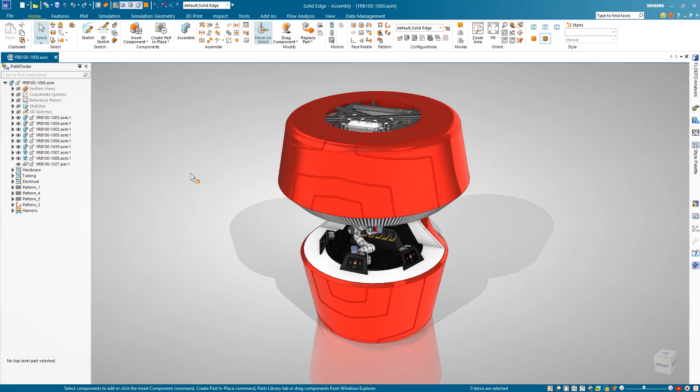Transform your manufacturing and maximize your design data with the powerful automated tools of Solid Edge's fully integrated CAD/CAM solutions.

Starting with some 5-axis machining, we'll focus on this part. Since it has features on all sides, a 5-axis approach will allow it to be machined in a single setup. The fixture has also been designed completely in Solid Edge, using a window frame technique, where the stock body also serves as the holding device.

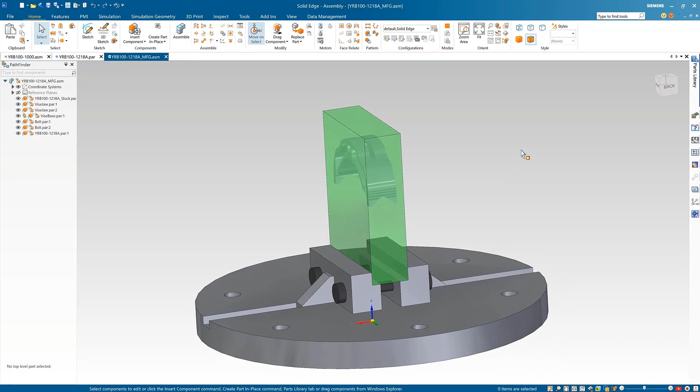A single button click sends the whole fixture and part to Solid Edge CAM Pro. Opening an existing setup reveals some CNC programming work that has already been done.

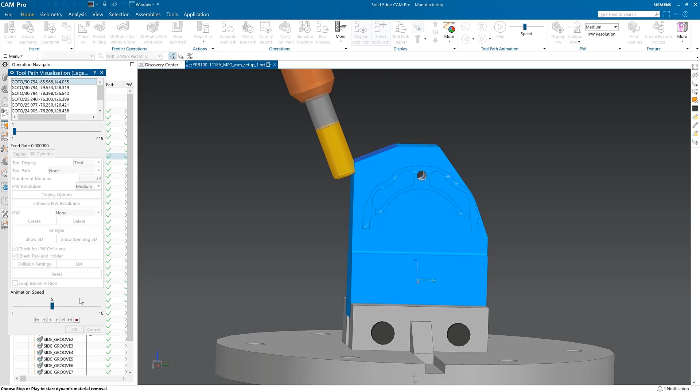Solid Edge CAM Pro now supports the adaptive roughing cut pattern for 5-axis roughing. This means very efficient machining and expert control on the stress of the cutting tool, which extends tool life as a result. Here, we'll also look at the machining simulation.

This is another great innovation in Solid Edge CAM Pro: the ability to perform G-code-based simulation. Here, the machine motion on the virtual machine is being driven by the actual G-code file. We can visualize all the axes tracking while the G-code file is being run, a true example of leveraging the digital twin.

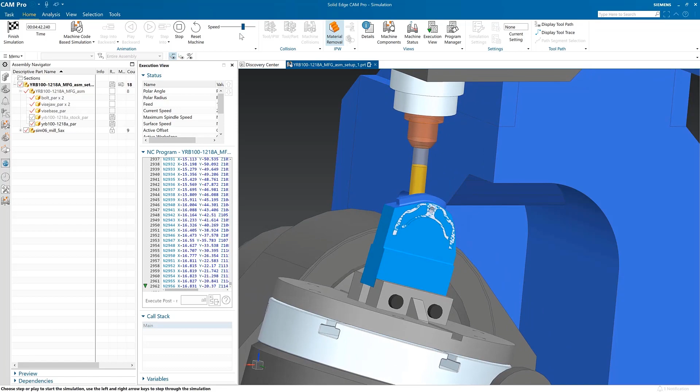Another great enhancement in CAM Pro is the addition of Smart Machining Kit simulation within the PostHub portal. There are packages covering 3, 4, and 5-axis G-code simulation. Each package provides access to all the machines in that group.

Also, PostHub can now be a repository for things other than post-processors. For example, best practice documents, technical libraries, and much more.

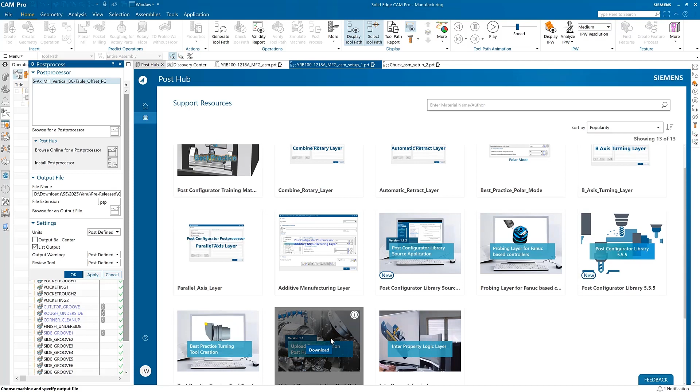Solid Edge CAM Pro also introduces a brand new wire EDM capability. This makes programming these operations a breeze.

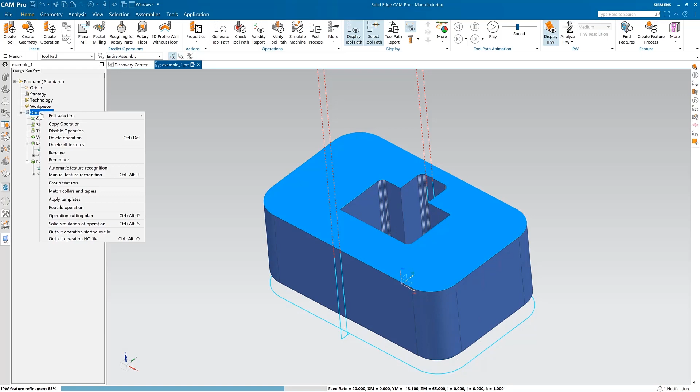Transform your manufacturing and maximize your design data with the powerful automated tools of Solid Edge's fully integrated CAD/CAM solutions.